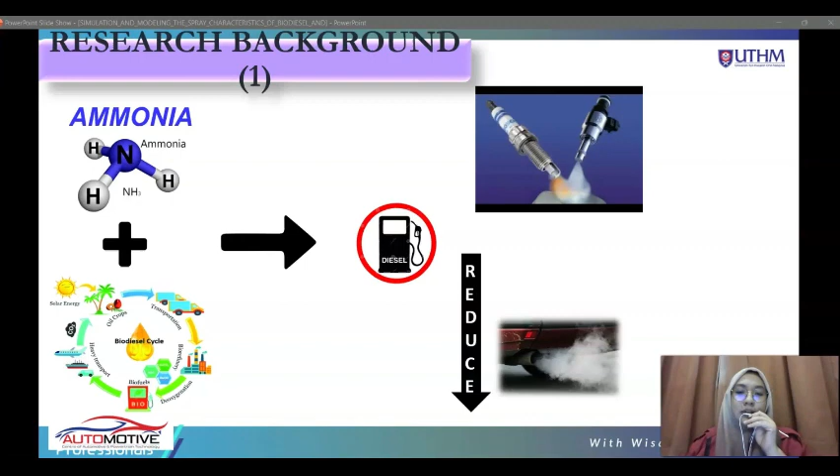Among the alternative fuels that can be used are biodiesel and ammonia. Ammonia is one of the renewable sources with no carbon content, and the combustion of ammonia only produces nitrogen and water as emissions. But ammonia has low latent heat and toxic properties, and these disadvantages of ammonia can be overcome with a mixture of other substances.

Biodiesel is also one of the renewable sources, and biodiesel has a higher flash point and lower emissions compared to diesel, but biodiesel has a higher viscosity.

Another method that can be used to reduce hazardous emissions is the improvement of diesel engines, by better fuel-air mixing as well as fuel droplet atomization.

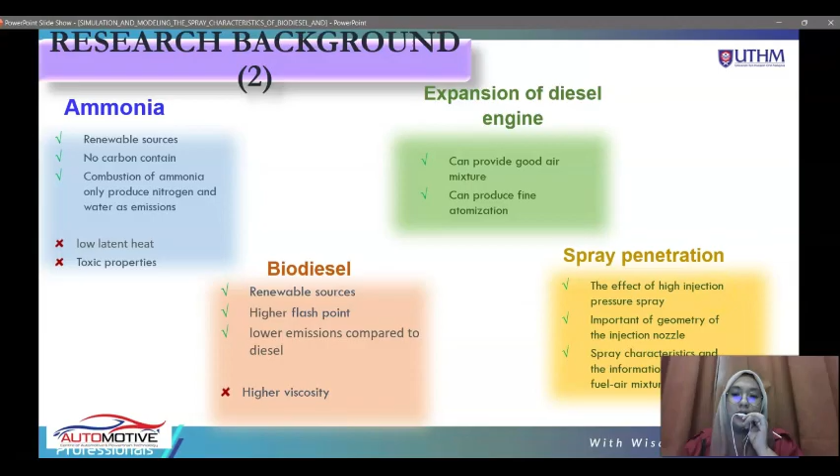The problem statement for this project is the increasing fuel consumption and harmful emissions from traditional fuel sources. Ammonia is a good alternative fuel as it does not produce carbon emissions, but it has a high latent heat of evaporation and low flammability, making it difficult to develop a combustion system for it.

In this project, the cost of RCM was high to analyze the ignition delay, so we changed the approach by using CFD applications to perform spray simulation of the biodiesel-ammonia mixture.

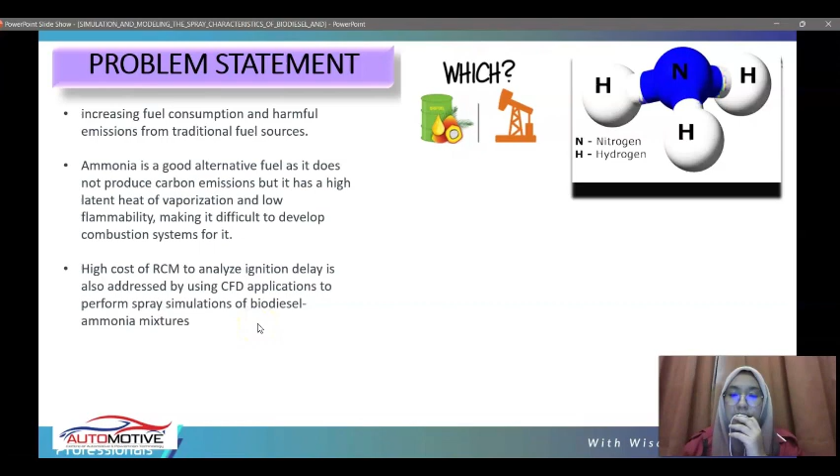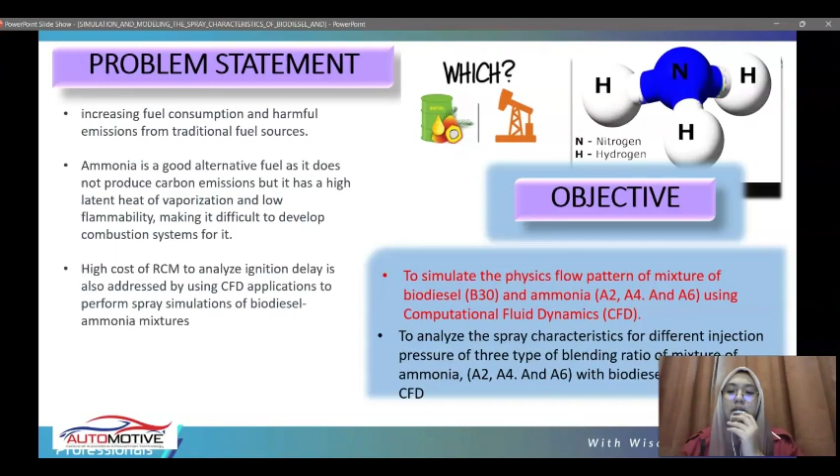The objective is to simulate the physical flow pattern of a mixture of biodiesel B30 and ammonia A2, A4, and A6 using computational fluid dynamics (CFD), and to analyze the spray characteristics for different injection pressures of the three blending ratios of ammonia, which are A2, A4, and A6, with biodiesel B30, using CFD.

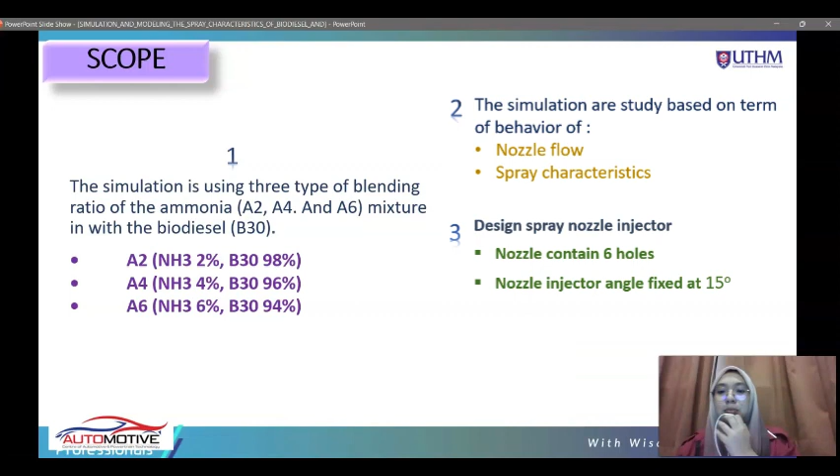The scope of this project is simulation using three types of blending ratios of ammonia mixed with biodiesel, which are ammonia A2, A4, and A6, blended with biodiesel B30. The simulation studies are based on the behavior of nozzle flow and spray characteristics. The designed spray nozzle injector contains 6 holes, and the nozzle injector angle is at 15 degrees.

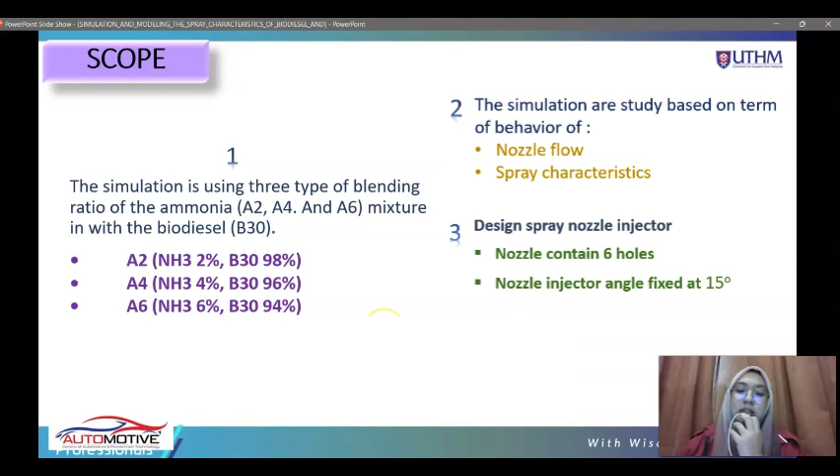For the literature review: a study in a journal on the spray characteristics of gelled propellants in swirl injectors found the influence of atomization behavior due to nozzle diameter, comparing spray characteristics of two different nozzle diameter injectors.

In a journal on the numerical simulation of incipient cavitation flow in a nozzle of a fuel injector, a combination of equations was found to simulate the initial cavitation where only cavitation bubble clouds appear, using large eddy simulation (LES), the Rayleigh-Plesset equation (RP), and the Eulerian-Lagrangian bubble tracking method (BTM).

In a journal on the numerical study of the influence of diesel nozzle geometry on inner cavitation flow, it was found that cylindrical nozzles are more likely to cavitate, and the value of the rounding radius is lower compared to conical nozzles.

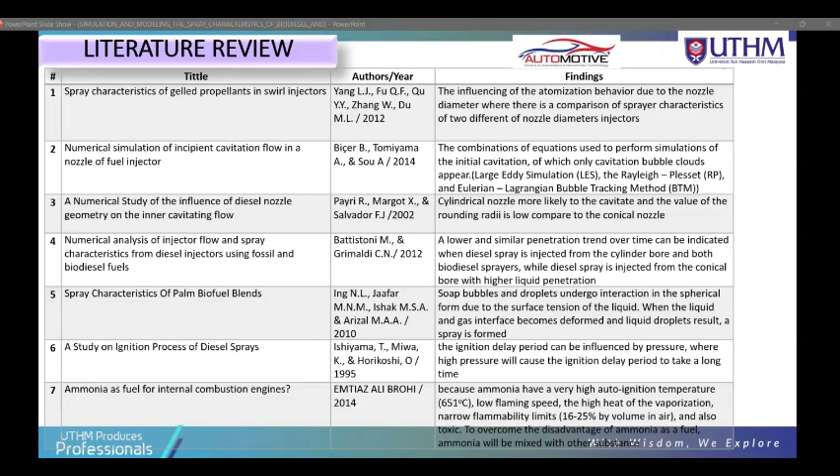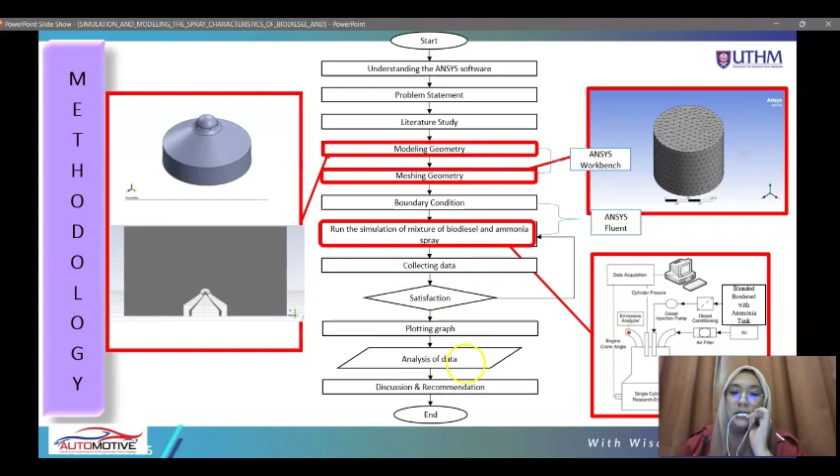The methodology of the process for this project was: first we must model the geometry, which is a nozzle injector that we will use to simulate with ANSYS Fluent, and then we will mesh the geometry, and then from the boundary conditions, we will input the boundary condition in ANSYS Fluent to run the simulation of the mix of the biodiesel and ammonia spray, and then we'll collect the data, plot the graph, and then analyze the data to see the spray characteristics.

The model of the nozzle injector has six nozzle holes with each angle being 15 degrees. The diameter of each hole is 0.129 mm. This is the half part of the nozzle injector that will be used to conduct the simulations in ANSYS Fluent.

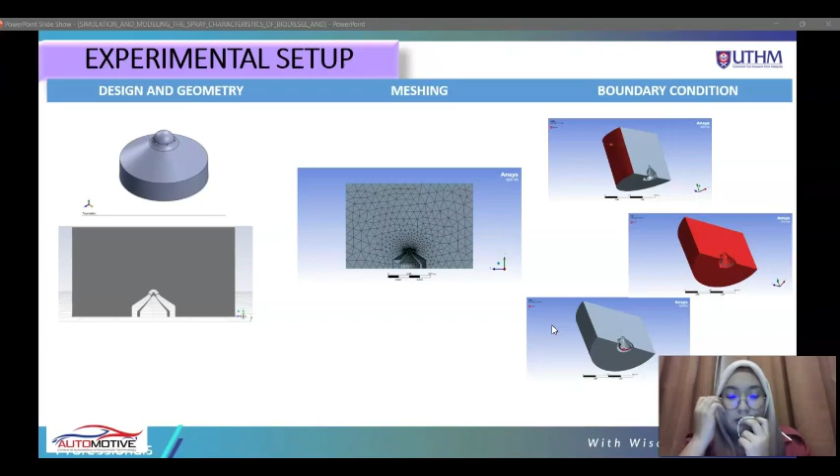For the result and discussion for the spray penetration length, from the simulation, we can see the impact of the temperature and density conditions on the penetration length of the biodiesel and ammonia fluid mixture using the half orientation nozzle simulation. By observing, the ambient density penetrations don't have much difference between the three types of biodiesel ammonia mixture.

And the ambient pressure has a correlation with the expanding spray penetration length, with higher pressure resulting in a greater penetration. And the ambient temperature also has a significant impact on the penetration length, with higher temperature resulting in a shorter penetration length, and ammonia being more susceptible to temperature changes. But in this simulation, we just fix the temperature to 850 K.

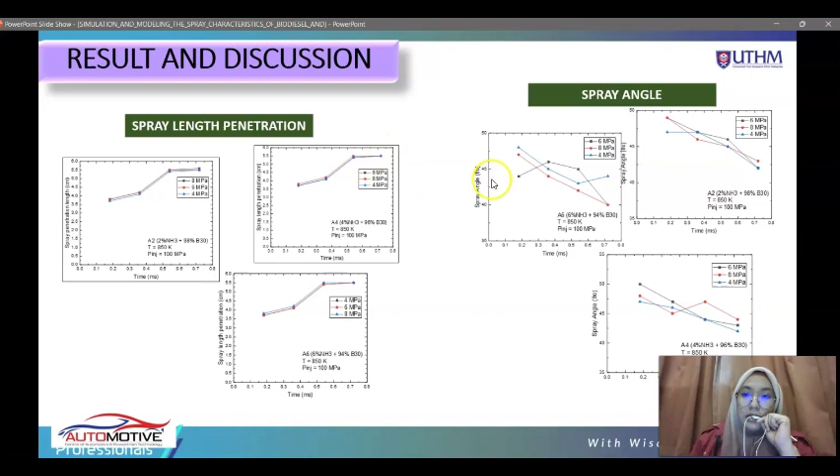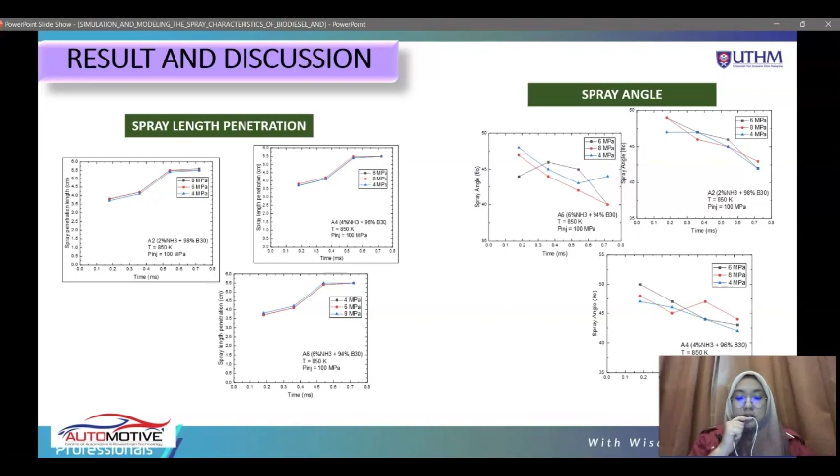For the spray angle, the angle of the spray is affected by the pressure and ambient density, with a shorter angle observed at lower pressure differences between the injector and ambience. The spray angle can be determined by measuring the angle amplitude and using the vector and a contour starting from the nozzle.

And the conclusion: this study found that higher ambient pressure increases spray penetration in every particular circumstance. Second, spray penetration increases in the presence of higher ambient density. Third, the ambient pressure or density of the biodiesel ammonia doesn't have a huge impact and difference on the spray penetration length. And then higher ambient pressure leads to greater expansion of the spray penetration.

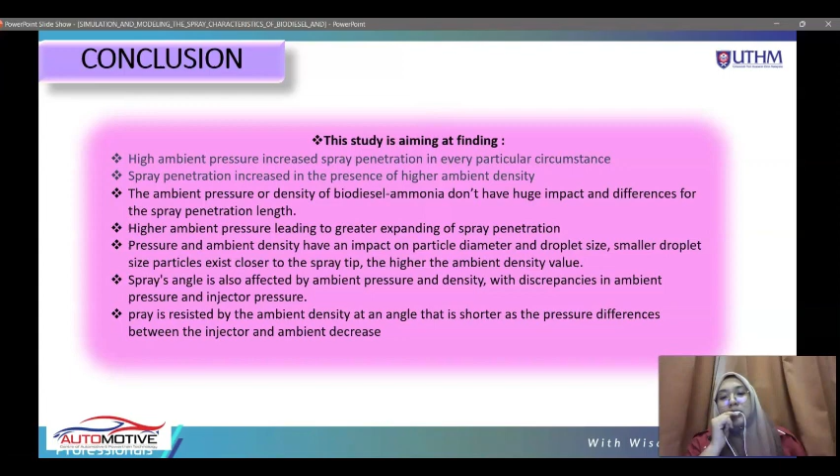Then pressure and ambient density have a higher impact on the particle diameter and drop size. Smaller droplet size particles are closer to the spray tip the higher the ambient density value. After that, spray angle is also affected by the ambient pressure and density, with changes in ambient pressure and increased injector pressure. Spray is resisted by the ambient density at an angle that is shorter as the pressure difference between the injector and the ambient decreases.